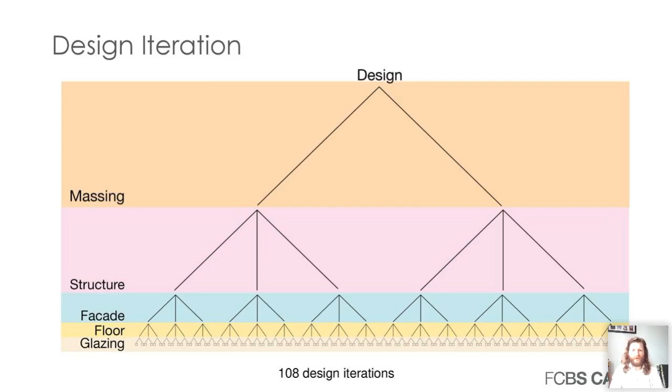And really, to understand whole life carbon, operational carbon is one thing. I think as an industry, we're pretty good at it nowadays. I think there's still gaps. We still need to keep pushing at it, but we're not too bad at it. We've got a grasp of the key ideas behind it. But really, for whole life carbon and embodied carbon in particular, we need a bill of materials. So you can imagine, in that previous scenario, I need a bill of materials for 108 designs, which nobody's ever going to make because it's almost abortive work for 106 of them, say.

So really, what we did instead was take a slightly different approach and a slightly different tack. We just want to know the impact between the 2 decisions. So is it better or worse? So we created a library of standard construction build-ups based on what we use as a practice. Just a rough idea of, this is what a facade looks like. This is what a floor could be. And then we use an algorithm to describe a building based on some key parameters. So the idea is it's not a real building, but it's a kind of standard building.

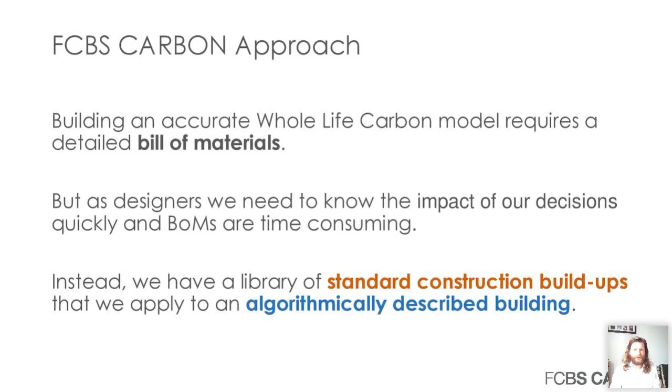And really, it's about recording the details of our project. So for us, we've got this route to 2025 for zero carbon in use. So how do we record that? How do we make sure we're progressing towards it? We also need to be able to estimate it in that first instance to make that record. And then thirdly, it's about understanding it.

So embodied carbon and whole life carbon is a slightly different viewpoint. It's certainly really picked up in the last couple of years. It's obviously been around for many, but the last couple of years it's really come to the fore. I think a lot of people are still struggling to understand what it is and how it works and what the key drivers are. So this tool is really there to help people play and understand and tinker with it. It shouldn't be daunting. It allows people to explore it in their own way. I think it's much easier for people to see it with a building rather than just read about it. Many people learn better that way.

It's really made for those early design stages. It's a bit like the notional building in SAP, if any of you are familiar with that. It's not a real building as such. It's indicative of a building, but it gives you consistency. So the direction and the magnitude of change when you change something like a facade material, although the outcome might not be perfectly accurate, and FCBS Carbon isn't hugely accurate, it's fine, it gives you the right ballpark for most buildings. It will be consistent. So if you change a material, it will tell you whether it's going up or going down. And that is really helpful to understand the scale of up and scale of down. Has it gone up by 1 or has it gone up by 200?

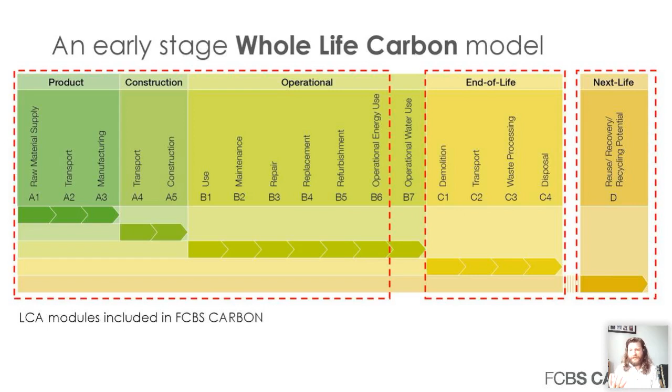So in that first stage, A1 to A3, we get the data from environmental product declarations, or EPDs, or the ICE database, which is the Inventory of Carbon and Energy from Circular Ecology, and it's free. Really good. If you haven't seen it, do have a look. It gives you standard tables of figures. And then these are estimated as percentage uplifts on A1 to A3. So all those A4, A5. It's very difficult to predict. It's very much about how you build it and how you maintain it and how those things are going to be assembled. So we use average percentages. It gives you a good start point.

I would say that predictions could go up as well as down. It sounds like a financial warning, but it really can. Figures from the ICE database are averages. Figures in the rest of it are also averages. You can pick better materials and you can pick worse materials. Just be aware of that.

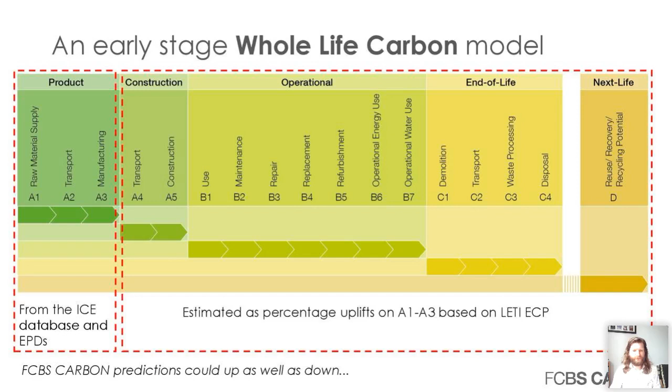So on to actually how it works. So there are 3 input pages and 2 output pages within FCBS Carbon. The inputs are in yellow, boxes in dark blue and grey are kind of calculated. They should be fairly colourblind friendly. That's the idea of them.

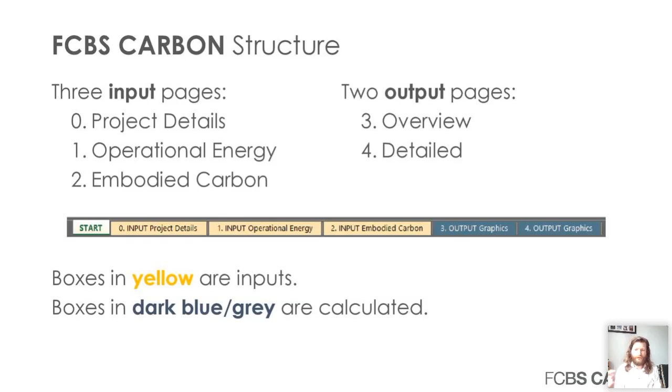The idea is that you just work through from 0 to 4 and you'll see the whole picture of the project. I would say we've done it as a linear kind of thing because that's Excel. It likes a linear format. It really isn't linear. It's about playing and tinkering with it. So don't just work your way through it and go done. Work your way through it and then go back and play with it and change stuff and really get a feel for it.

So on the first page, this is the input page. It's kind of the boring bit, if you like. It's the kind of setup for the rest of the project. What I would say is it's full of global variables that if you don't fill in, things will break and you won't necessarily understand why. The classic one is estimated year of completion. Make sure it's either this year or a year in the future. Don't do a previous year.

We actually estimate, predict decarbonized grid and things like this. So it does pull in a few other things in there. So just make sure it's this year or in the future. Sectors, there's only 2 sectors in the available one that's online. So there's housing and offices. So this is ostensibly about schools. Treat them as domestic and non-domestic. That's probably what it is, more than housing or offices.

Actually, it doesn't really make much difference for the embodied carbon bit. The only thing it makes a slight change for is the operational energy predictions. I'll show you those in a second. The space for text, if you want to write down some environmental objectives, I recommend you write them when you think of them, whenever you get the chance. At some point, I'm sure all of our buildings will be going for awards or something similar. It's nice to have those written down somewhere so you can find them again in the future.

This is the input and the operational energy page. Quite a lot going on. You have these graphs here, so we're always comparing things to the RIBA 2030 challenge. For an architecture practice, it's important for us. On the left down here, and I realise you won't be able to read these, and when we show you the spreadsheet, I'll show you in a bit more detail. We have a little bit which gives you benchmarks for electric and non-electric energy use, effectively electric and heating, heating for water, and breakdowns which will align with things like TM22 or TM54 as well, about how you're going to use your energy.

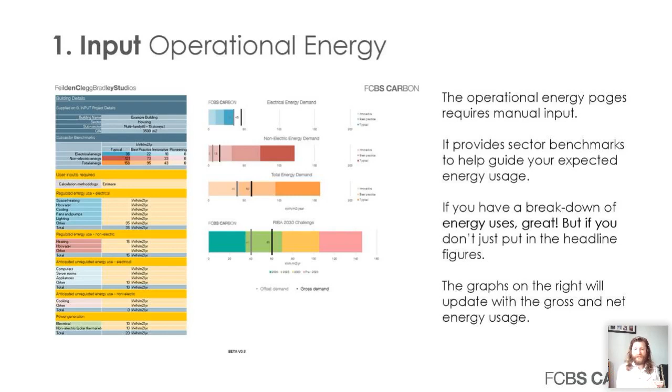If you know those figures, brilliant, amazing, you're ahead of the game. I'd say most people don't, and most people actually just estimate it. And down here, we've got some power generation at the bottom left, so maybe it's PV panels or solar thermal. Just to note on these graphs, you will see there's two lines. One is gross demand, the other one is net demand. Now, we're always reporting both. We want to make sure that we're low energy first and then using renewables. That's why we report them separately.

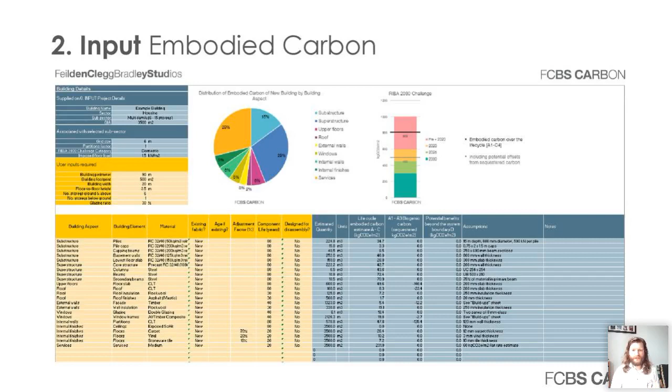This is the main bit of it. This is the embodied carbon page. Again, just the bits in yellow we're going to have to fill in, and it looks fairly daunting, but most of it's done for us. So in here, we've got standard parameters. These are things that are specific to our design and tend to be things that we can measure off. Maybe it's a SketchUp model, maybe it's a hand sketch. I've done previous talks where I've used Google Earth for an existing building, so we've measured off Google Earth. Actually, it works fine. But standard bits and pieces. It's not too tricky to do.

And the key here is put in your best estimate. If you're not sure what it is, we can always change it later. And you also see how sensitive things are. So you can put in a glazing ratio. Maybe you want to use the LETI targets. Put that in there. Maybe you want to just see if that makes a big difference. But if it doubles, you can just change the number really quickly. Build up the rest of your building, change it, see what happens. It might not make very much difference. It might make quite a lot of difference. Difficult to know. So put in your best guess there.

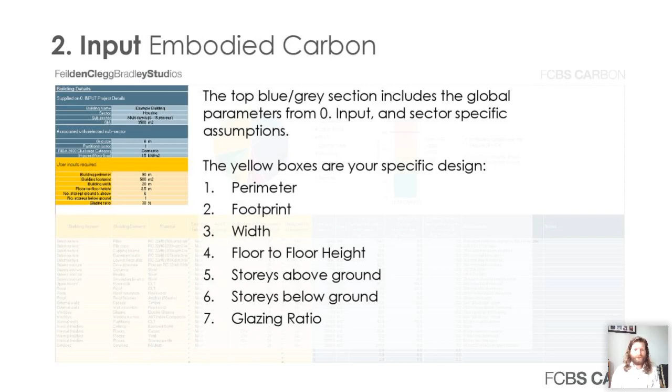In here, this is where you start to select materials and talk about the materiality of the things that are going into your building. The first three columns are all about materials and constructions. The first one is building aspects. This is according to the RICS standard, so it's substructure, superstructure, things like this.

The second one is the actual building elements. So maybe that's piles or pile caps, or it's cores, columns, facades, flooring, whatever else. There are kind of subsectors. And the third one is materials. These are curated build-ups, and it could be something as simple as a solid lump of concrete, or quite a complex steel framing system with a ceramic tile facade or something like that. We build all that up for you.

You can say whether it's new or existing. So if you're working on an existing building, you can say it's existing and add those bits in, or it could be reclaimed materials, and you can say they're existing there too, and that helps. There you can put in component life as well, really important. We need to look at those replacement cycles. It can be huge, so do be careful when you put those in.

There's another column in here called the adjustment factor. I'll show you how that works. The adjustment factor is basically there, given the way the building is modelled within FCBS Carbon, to help you make sure it's a bit more responsive. It could be as simple as adding in more lines. You might have 2 or 3 different floor types: wood floors, tiled floors, carpeted.

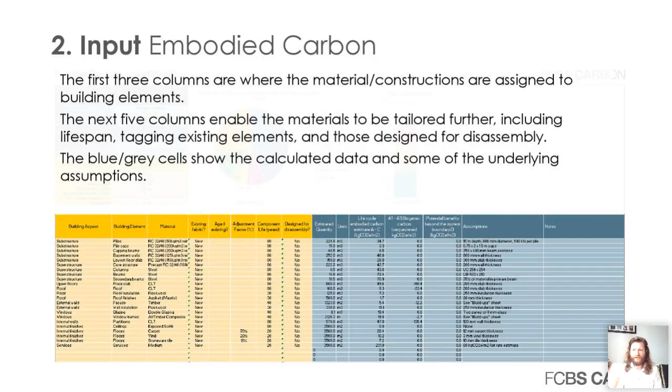And this is what it's modelling behind the scenes. You can't necessarily see this, but we use stuff that we build in FCBS Carbon and build all these bits up. So we've got steel framing systems and all the materials that sit with them. We put those in, so you don't have to think about it. You just have to think about the end result.

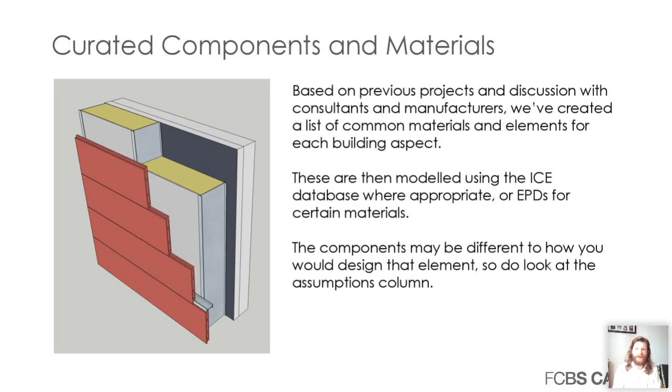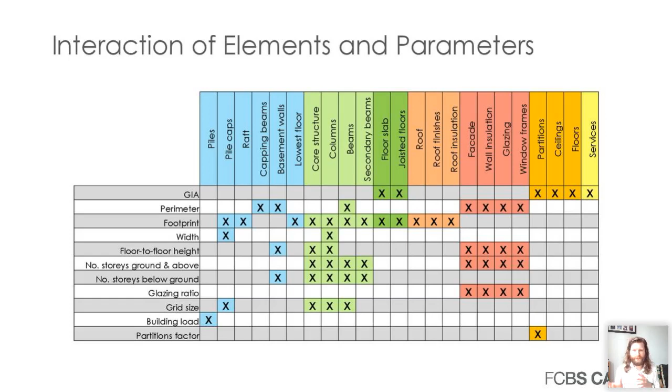And these bits will show you the impact. These are your building elements, and it will tell you very quickly. If your building's emitting an awful lot from, say, substructure, you can see the things that will affect the substructure. So you can tinker and have a little iterative play with it.

So onto the outputs. These are presented in a way that hopefully means you can just print them off and stick them in a report, and everybody's got all the information they could want. There are tons of ways of slicing this information, and everybody wants it slightly differently. This is our current best thought, but if you've got particular needs, let us know. We can maybe start to build those in for you.

On the top left, we have, oops, if I click back on here. So on the top left, we've got operational energy. Bit of a summary of the graphs you saw on the input page. So at the top, you've got our RIBA 2030 challenge bar. And then you've got the 3 bars showing electric, non-electric, and total energy demand. We've got a few bits in here about energy uses, renewable bits, annual carbon emissions. So we've got carbon emissions based on current Part L and SAP 10.1. So you can get a rough feel about how it sits.

In the top right, we've got embodied carbon. So this is showing full embodied carbon. So it's not just the upfront, it's all the way to the end of its life for a 60-year period. Again, we've got the RIBA 2030 challenge at the top. Again, 2 lines, net and gross. So we've got one which includes sequestered carbon, another one that doesn't. So you can see those, nice there. We don't include sequestered carbon by standard. So it's always going to be an addition. You should always report it as a separate line item.

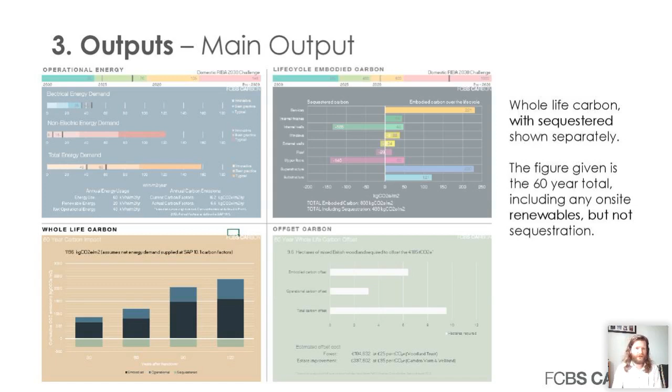Bottom left, we've got whole life carbon. So if you want to see how it goes in a bit more of a standard way, so 30, 60, 90, 120 years. Operational carbon in the lighter blue, the darker blue bit being the embodied, and then below the line is, I think, renewables or sequestered. So we can see those other bits that are seen with it. So you can start to see how it works. Again, we'll show you this. You can see replacement cycles and the impact of that as well.

And then at the bottom we've got our offset carbon. So some people struggle with what carbon is and trying to understand what's good or bad about it. So we turn it into hectares of forest because everybody loves a forest and it's a bit easier to see, really. We've got some indicative costs for different systems. We don't necessarily endorse them, but there's one which is about planting trees, which is from the Woodland Trust. The other one is about estate improvements, so improving somewhere else to offset your carbon. So we've got the Camden Warm and Well Fund, which I think still exists, as part of their offering for zero carbon in their borough.

For those of you who are really into embodied carbon, I'm sure by now all of you are, this page is probably the more interesting one. If you want to report some of the figures, what we actually have here in the top left is a breakdown per stages, so you can see where it's all being emitted. So in this project here, we've got quite a lot of biogenic carbon in the first column. See, it's below the line. Next one is our A1 to A5, so that's our upfront carbon. So all the carbon that's emitted before somebody moved into the building, really quite high.

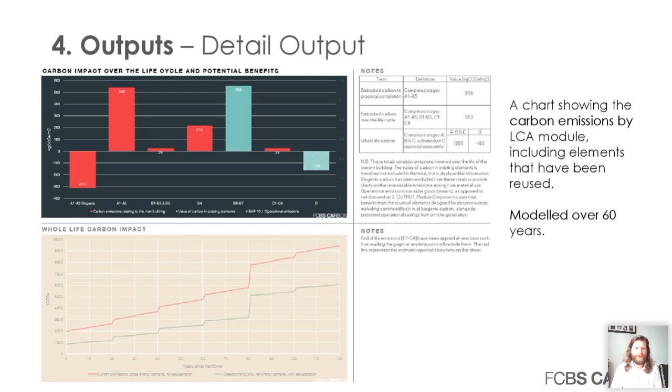The other one I'm really interested to note here is this blue column here, B6 and B7. So operational energy, so you can see operational energy over 60 years and the initial upfront carbon of building the building, about even. So quite an interesting take. So you can start to tinker with that. And up here we've got a little breakdown, so if you just want to see the figures and the numbers, you can take that straight out of there, nice and easy.

And then the bottom left, for me, this is the one I use most often. I find this one a bit more engaging. We're looking at a line chart just showing exactly how the building's going to be emitting carbon over 120 years. And it starts with that upfront carbon, and then each of those little lumps are replacement cycles of bits of equipment.

We use 2 lines. There's not a lot of consistency about how we include some things and not other things. So the red line being the worst case scenario. So we use just current grid factors. We don't include PVs and any energy they generate, and we don't include any sequestered carbon. The green line is the optimistic version, if you like. So it's got sequestered carbon. It's got grid decarbonising figures. So you can see there should be a slight little curve to it.

And we include renewables, so you can kind of see the difference between the two of them. So really kind of useful. And again, you'll see these in a bit more clarity when I actually use the spreadsheet. So probably the project will be somewhere between the two, but it's useful to see it. It's quite nice to see these, particularly these little jumps and bumps where you replace things every 20 years. This has probably got services every 20 years, and here's probably something structural, I guess, at kind of 80 years.

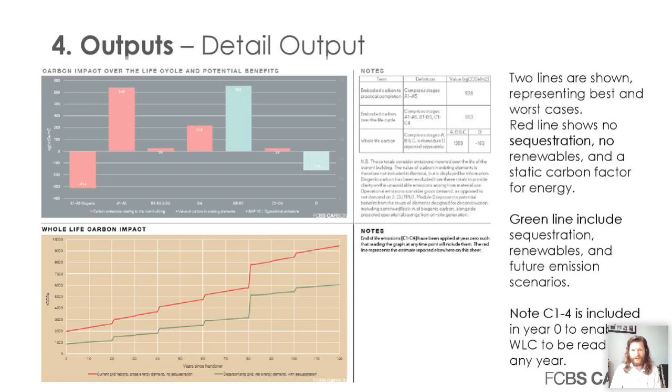So on that note, I'll give you a quick demo of it. I'm going to show you how it all works. Let's turn my screen share on. So just for those that are interested, this is where you download it from, so FCBStudios.com/FCBS CARBON. It's free, you just need to put your details down at the bottom.

I obviously don't have this open all the time. This is just for yourselves. This isn't my background or anything odd like that. There's a video here. It'd be very similar to this one, although Joe Taylor also did some of the talk, and he's probably a bit more eloquent than I am in some ways.

So here's my building. It's an absolute beaut, as you can imagine. For clarity, I'm an engineer, not an architect. As you can see, we've got a basement floor. It's a bit difficult to see, but actually we've got a slightly taller ground floor compared to the other floors. And it's not quite square. Oh, it's lovely. So the question is, how do you model that building in it? So you've got kind of all these dimensions.

If I open one of these up, so when you open up a spreadsheet, it will look something like this. This just gives you a bit of background info. It just basically says, don't sue us, and thanks all the people who helped us develop it. So many people did input into it. In here, this is where you'd import the data into it. So if I just zoom in a bit so you can actually read it.

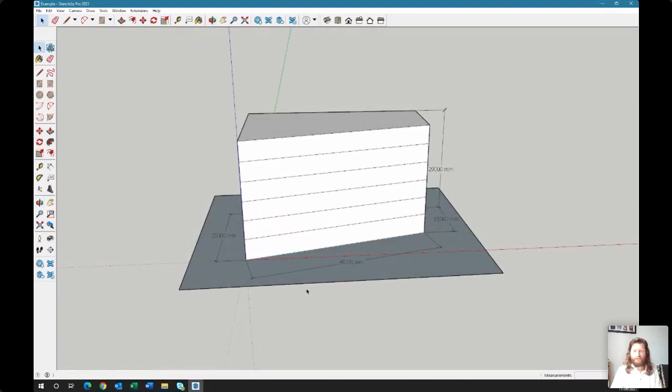Just a note on here, if I open up the SketchUp file again, our building was a bit wonky. So we've got 25 meters on one side, 15 meters the other side. The way I input that into here is I've put that in as 20 meters as a building width. So the building width is the narrower of the two dimensions. And really, if you've got a building with a courtyard, say, it might be better just to assume it's a long, thin building.

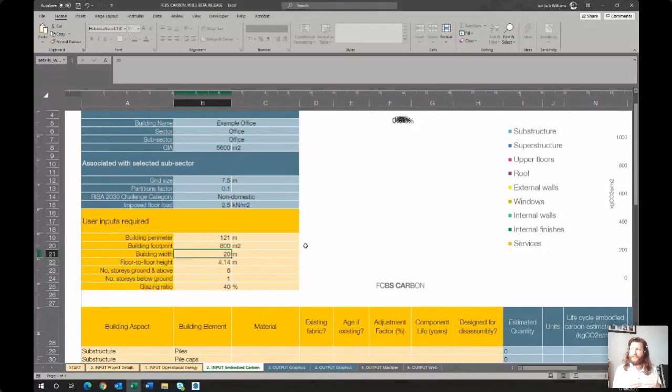It doesn't matter about orientation. Currently, we don't really use it. So you can unwrap it, if you like, and the width would be the thickness between the outside wall and the inside wall of that courtyard. All it's used for is setting up a structural grid system. We could assume it's square and get a rough idea, but actually we want to know how rectilinear it is. So that's what it's there for.

A quick note on floor to floor height. The easiest way to do the floor to floor height is to take the total height of the building above ground, divided by the number of stories above ground. If you've got 20 different sizes, it doesn't really make much odds. If you've got an atrium that fills up space, or a sports centre that fills up half the floor plate, don't worry about it. Take the full height of the building and the number of stories, and it'll sort all those bits out. Stories above and below ground, so nice and easy.

So we're going to start here, and I'll start building these things up. Now there's a key note here. These are our pre-curated materials. We've got piles in here, so I'm going to go for this. We're not going to have any GGBS. Just note it comes in at an estimated quantity of 0. Piles is the one which is slightly weirder compared to the rest. The piles are dictated by the weight of the building, so when we build up the rest of the building, the pile figures will change. So when you first put it in, it'll come at 0, and you'll start to see those update as soon as I put the bits in.

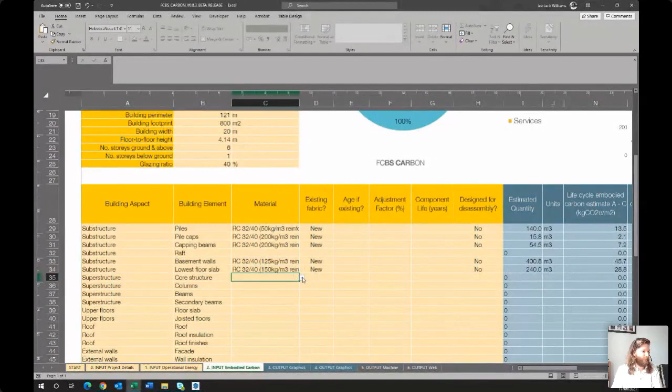I'm going to put some pile caps in, some capping beams. We've got piles, we've got capping beams. We don't need a raft foundation, so we can leave that one blank. We do have a basement, one floor of basement, so I'm going to put that in. Lowest floor slab. This is often overlooked. It's the bit on the ground floor. It's not one of the floors. We've got a core in here. We could fill all these bits in, but I won't go through all those bits.

But you start to see as I add things in, if we put in some columns here, you'll start to see the pile figures increase. I won't fill it all in now because it's unbelievably tedious watching somebody fill these things in. So I've already pre-filled this in the Blue Peter fashion. I've identified all the bits we've got.

So we've got a concrete frame structure, concrete floor slabs. We don't have any secondary beams or any beams at all. They're actually just columns with slabs running all the way across, doing all the work. Maybe we want to put some beams in. We can have some beams in if we want. Why not? It's fine.

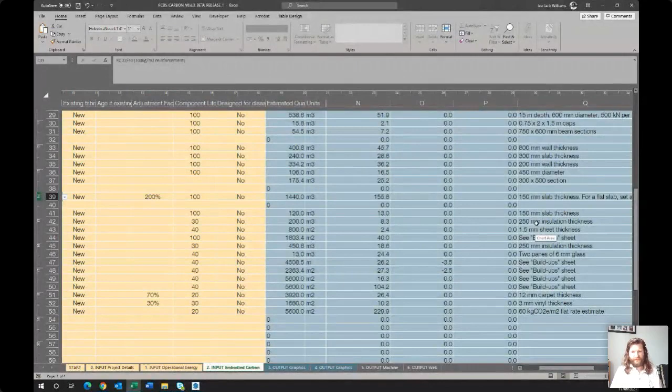We've got some insulation in here, roof finishes. What I would say is our floor slab, when I look down here, our floor slab is 150 mil, is how I've set it. That's kind of standard. Actually, we think maybe this is going to be slightly bigger. So if we get rid of the beams, go back to our floor slab being twice as thick, it's doing all our structural work. Long spans, so we put in 200%, so that means it's now going to be a 300 mil thick slab assumed.

Similarly, in here, we're going to have raised access floors throughout. 70% of it is going to be carpeted, 30% of it is going to be vinyl, so you can build these things up as you can imagine. I know in here, we've input component lives all the way through. Nice and straightforward. We could say things are going to be designed for disassembly so they can be reused, and that'll help on module D figures. But otherwise, that's kind of it. It doesn't generally take that long.

So now we've got that built up, and it does give you indicative figures at the top here, so you can see where we're sitting. So a bit of a spoiler, our standard concrete frame building isn't doing hugely well. It's about 890-ish, probably a bit difficult, but it'll be a bit easier to read on here. So this is output 3, just that summary page as discussed earlier. The things we're interested in are carbon factors down here, you can see, and these carbon bits here. So if I zoom in on this, it's a bit easier to read.

So we can start to think about, okay, so we're at 889. There's a small amount of sequestration. I think it's probably bits of timber, certainly the raised access floors, we've got timber cores in there. It looks like we've got some timber in the windows as well, window frames. Services, absolutely huge. Finishes, substructure, upper floors, there's an awful lot sat in those bits. So maybe that's something we need to have a little look at, and we can try and fix those bits.

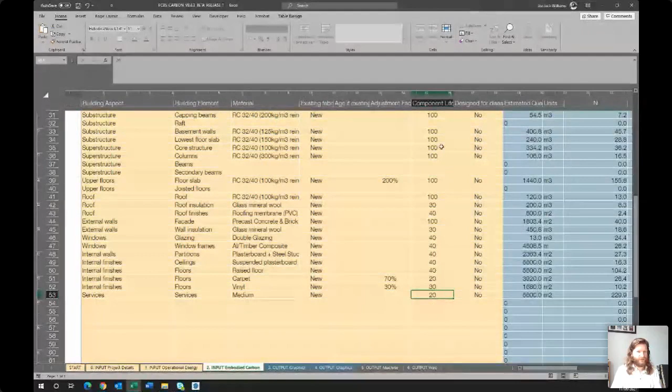And again, these little replacement cycles of services and a bit of structure there. So if I go back to here, I can see that my services have been replaced every 20 years, and also bits of structure in 100 years. So we can go back and start to tinker and change these bits. So I'm going to go back to another version of it, so you don't have to see me endlessly enter bits of boring data in.

One thing I've done is I've got rid of the basement. Let's try and avoid the basement. So I've gone 7 stories above ground rather than 6, so I've pushed it all up a bit. I've reduced the floor-to-floor height a little bit, so now it's 3.95. It's a little bit easier to do. Glazing ratio is the same. What I've done is I've added a concrete mix. So in here, you can see where it's concrete before, I've just added in a 25% GGBS mix. Hopefully that's going to help a little bit, and we can see whether that's made much difference.

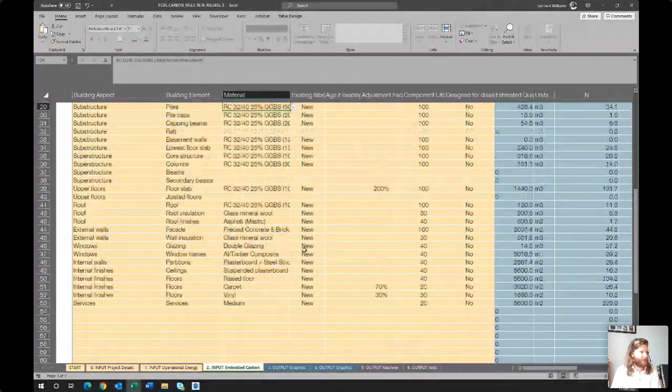So if I go into the output now, let's just check out the changes. And you can see in here, we're down to 802 kilograms of CO2, it might be a bit difficult to read on your screen. There you go. So we saved about 85 kilograms of CO2. Bloody brilliant, really good. Not bad. It doesn't take very long to make those kinds of savings. We haven't really changed much. Taking that basement out, bump the building up, use some GGBS. Actually, 25%, not an outrageous amount.

It won't affect the program too much. Well, we can probably do a bit more than that. We can probably really start to tinker with it. So we can go into, this is my third one. Again, all I've done in here is we've gone for a super green version, if you like.

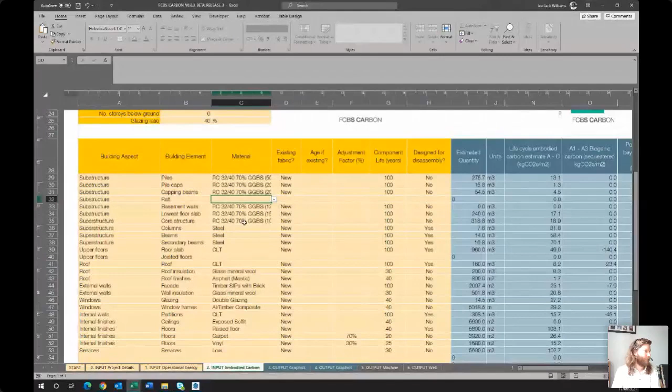So I've improved the GGBS content, so I've gone to 70%. Obviously, we're going to have a lot of program implications as a consequence. I've kept all these the same. Just a note, if you are changing these global parameters, be really careful that you're not changing something that would affect your GIA. GIA is input manually by you on page 0. If you do change things like this, it will have odd effects. Just make sure you change them both at the same time.

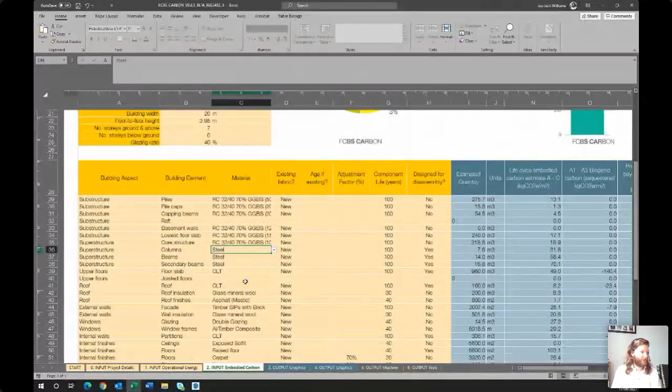So I've gone for a hybrid structure in this one. I've got steel columns and beams with some secondary beams in there as well. We've got CLT floor slabs and CLT roof. Otherwise, very similar. I've got CLT partitions. Maybe you want to have something else. Something else I could probably put in there.

So raised access floors can be a really huge bit in here. But they don't necessarily have to be brand new. They tend to be wood core with galvanized steel wrapped around the outside of it. We could reuse them from old buildings. Really easy to do. They just take a bit of cleaning. They don't tend to look so nice, but that's fine. So we can change that to existing.

What that effectively means is that although we account for it, we don't include it in the final calculation. So we've got a figure for it, it's just not included. If you wanted to in here, you could put age if existing. So some things will only last 60 years. And if you take something out of a building that's already 30 years old, and you say in here it's only going to last 60 years, it will assume that the 60 years starts from the original, so 30 years back. Just be really careful when you use that. It's a bit of a tricky thing. It's there for completeness. We don't really expect anybody to use it unless you're really getting stuck into refurb. If you are, that's really exciting, but do be careful with it.

Services, we changed the services down to low. Estimating embodied carbon of services is really difficult to do currently. CIBSE TM65 came out in January this year, which is great. I think prior to that, there wasn't really much there to help guide what the figures would be. These are taken from a Scandinavian study, actually, which is a bit of an estimate. So what we've got is low, medium, and high.